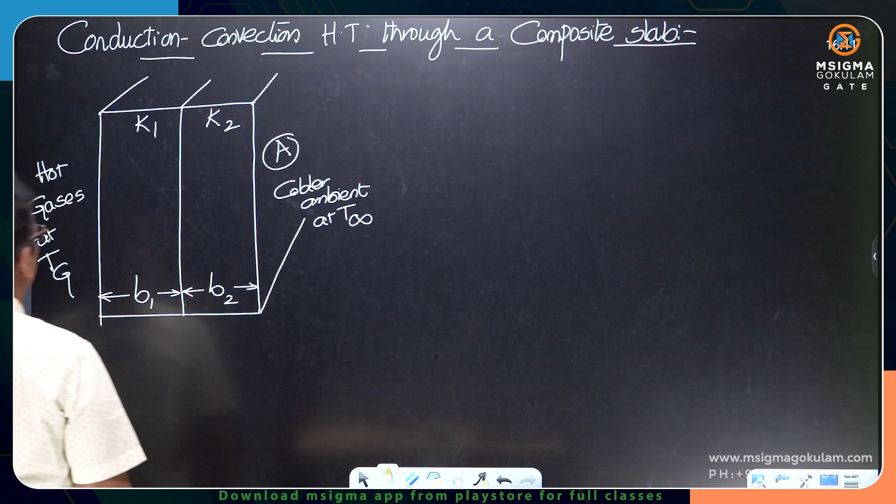Colder ambient at T infinity. Hot gases at Tg, colder ambient at T infinity. The heat transfer is happening through that composite slab in this direction, Q. Okay.

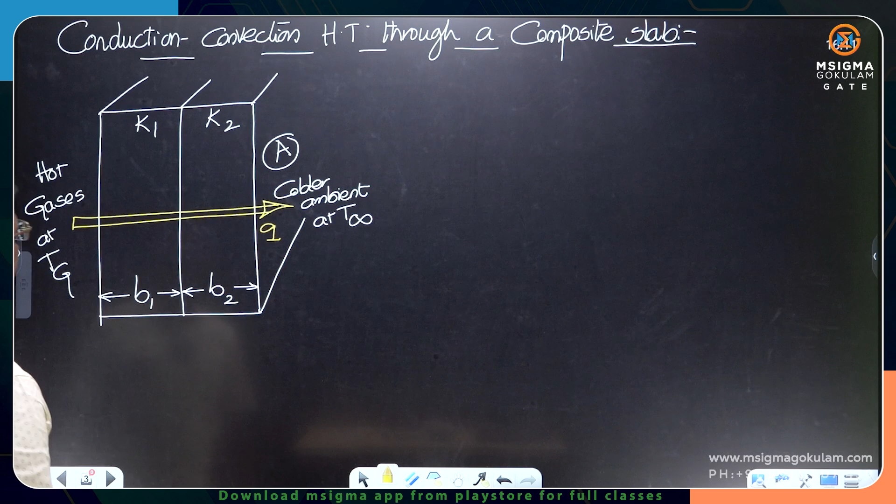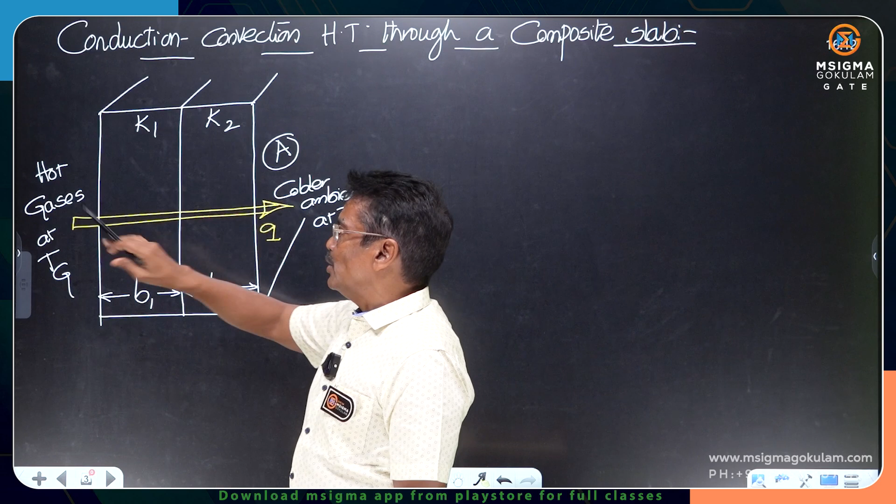There is a composite slab made up of two materials, okay, having the conductivities K1, K2. One side of the slab is exposed to the hot gases at Tg, and the other side of the slab is exposed to the colder ambient fluid at T infinity. Tg is far greater than T infinity.

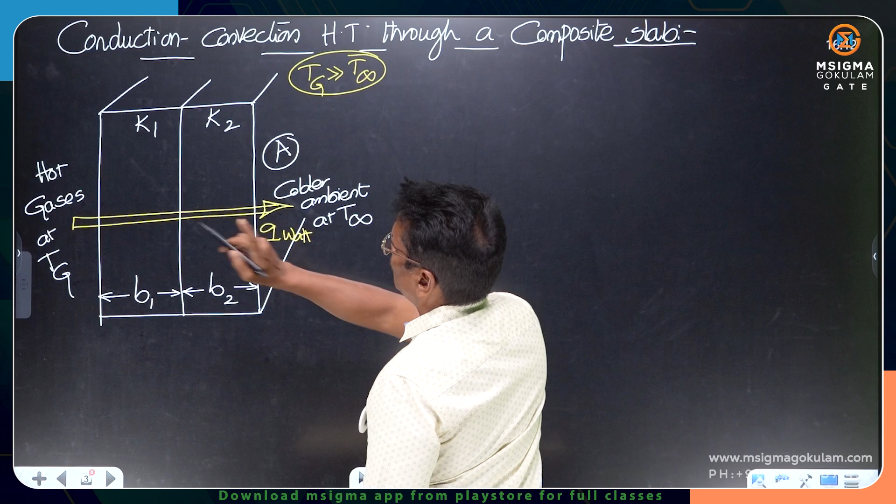Some flue gases are there. Hot flue gases are generating the heat. Now, I would like to calculate what is the rate of heat transfer. Rate of heat transfer in what? Between the hot gases and the colder ambient fluid, and how to calculate the junction temperature. Okay.

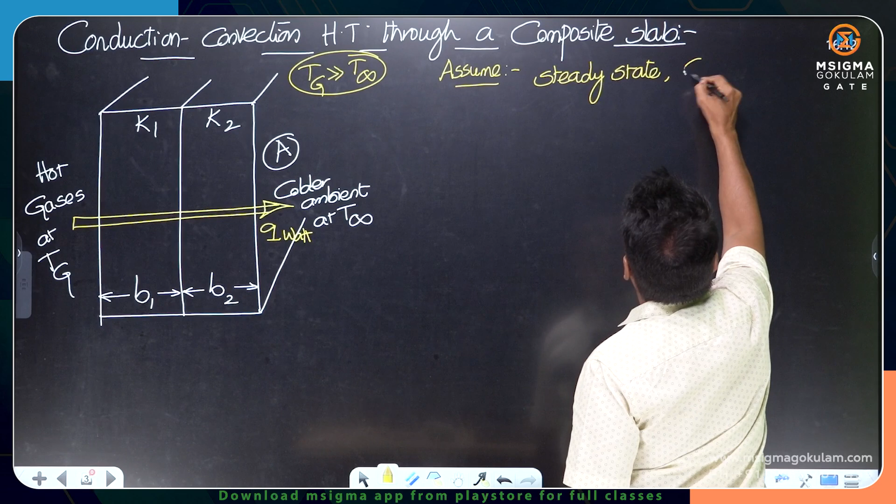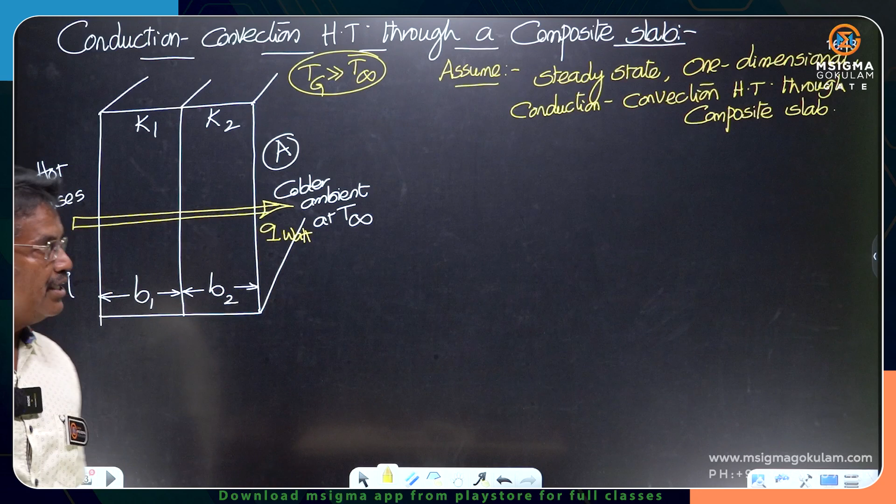Assume steady state one-dimensional conduction convection heat transfer through composite slab. Assume steady state one-dimensional conduction convection heat transfer through composite slab.

So, the main heart of the problem is construction of the thermal circuit and its understanding. In any heat transfer problem, particularly in this chapter of conduction, one must clearly understand what is the thermal circuit and how to calculate the heat current. Okay. So, the thermal circuit looks like this.

How many resistances there? Means what is the mode of heat transfer between the hot gases and this side of the slab? It is by convection. Because between the hot gases here, the heat transfer occurs by convection. So, whenever there is a convection, how do you notify that? With a given value of the convection heat transfer coefficient. So, there is a convection here.

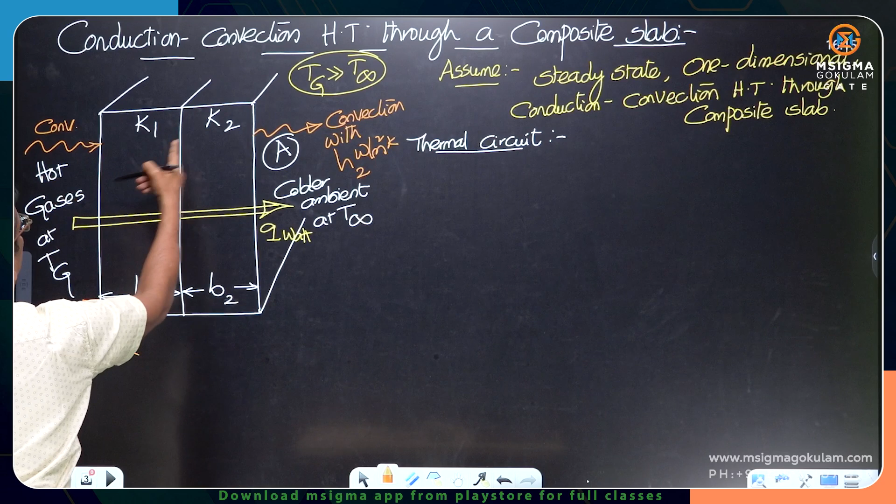There is a conduction here, there is a conduction, and again this side there is convection with H2. Convection, conduction, conduction, and again there is convection. So, you speak of convection, H is always a given parameter. Particularly in the conduction chapter, you are talking about convection, H is a given parameter.

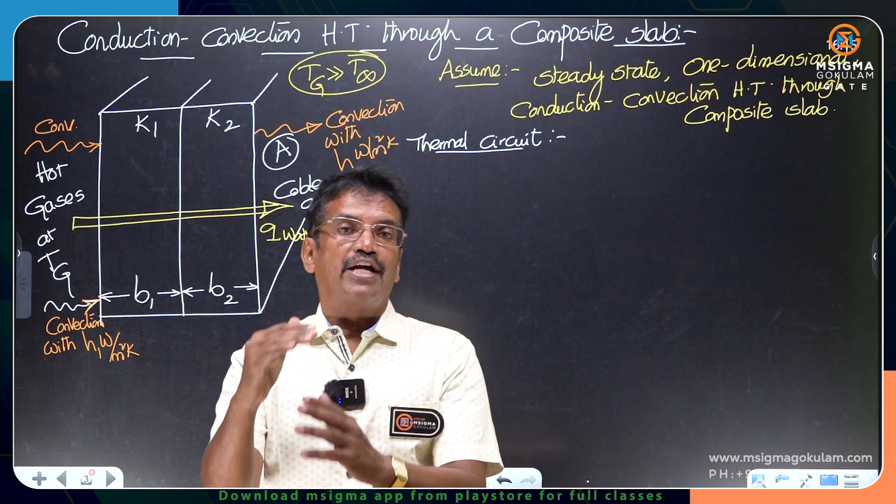But later when you enter the convection chapter, our main focus would be how to calculate that convection heat transfer coefficient from a given data of the solid body and the fluid flow. We will be calculating how to get that H. So, in the entire convection chapter, our main focus will be how to calculate that H value.

But in the initial chapters and initial topics of conduction, wherever convection is spoken of, H is always a given parameter, which is a convection heat transfer coefficient, also known as the film heat transfer coefficient. Look at the units there, watt per meter square Kelvin.

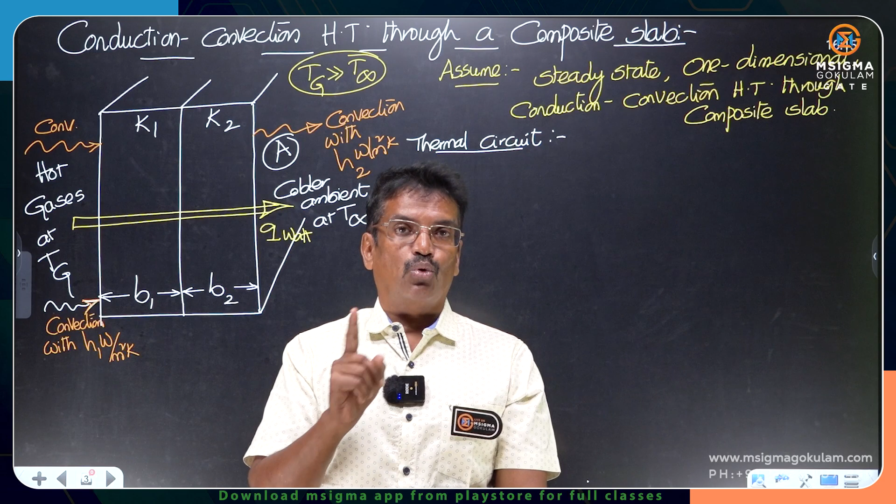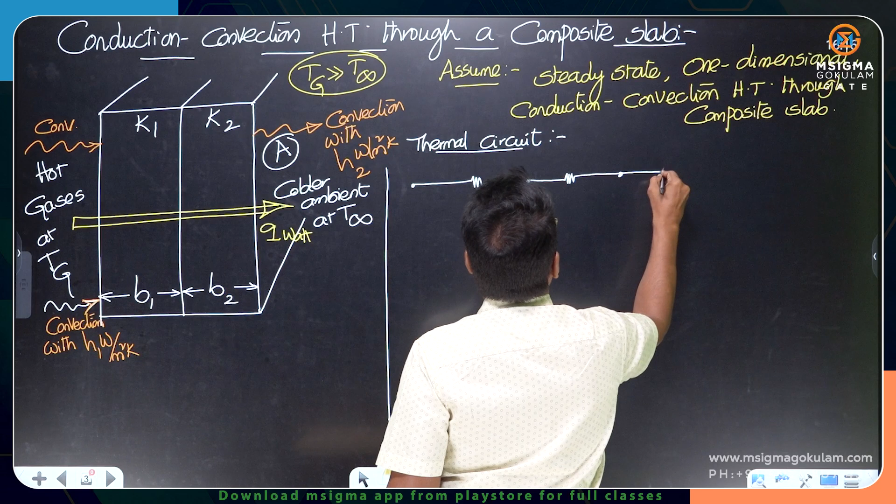Okay. So, the thermal circuit contains how many resistances? Convection, conduction, conduction, and again convection. So, the thermal circuit comprises 4 resistances: convection, conduction, conduction, and again convection. Tg and T infinity. So, will be

the temperature profiles will be like this. Why it is curvilinear like this, you will come to know only when I teach the thermal boundary layer concept in convection. So it is curvilinear here, straight line, and again curvilinear. This is the temperature Tg, this is T infinity.

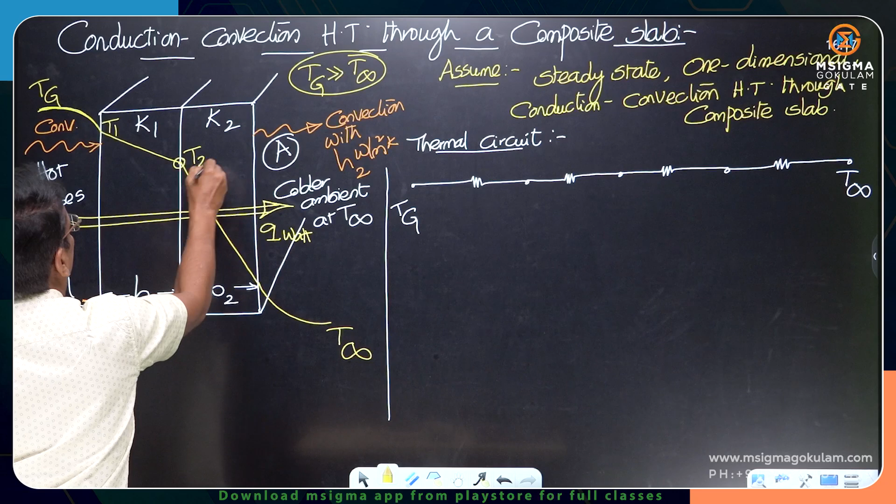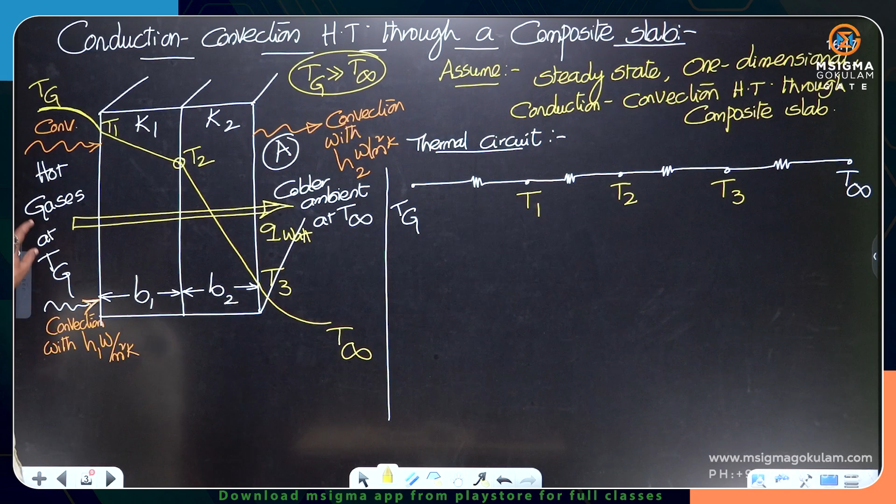This temperature is T1. What is T1? The leftmost temperature of this composite slab. This is T2, junction temperature. This is T3. Okay, Tg, T1, T2, T3 and T infinity. Tg is the temperature of the gases, and T infinity is the temperature of the colder ambient, maybe atmospheric air. So first convection, conduction, and again convection.

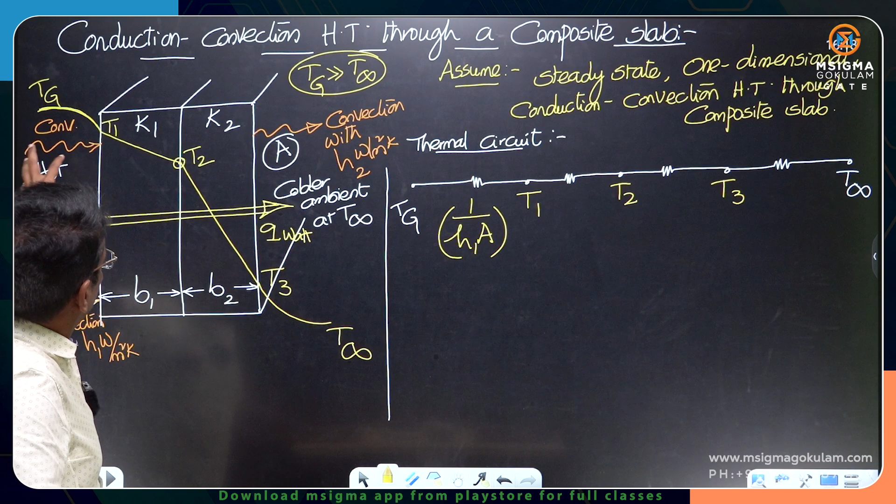What is the first resistance? Convection thermal resistance 1 upon H1A. That is the first resistance, convection. Then you will have the conduction resistance B1 by K1A. Then you will have the conduction resistance B2 by K2A, and finally we will have the convection thermal resistance 1 upon H2A.

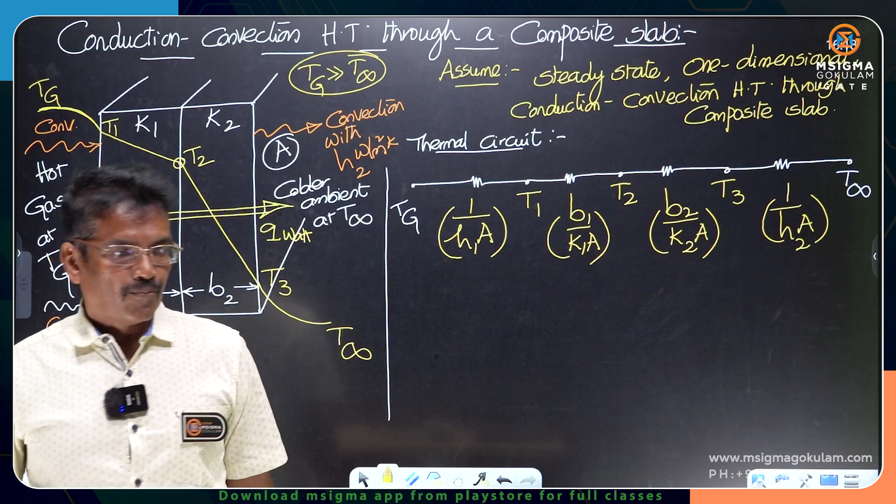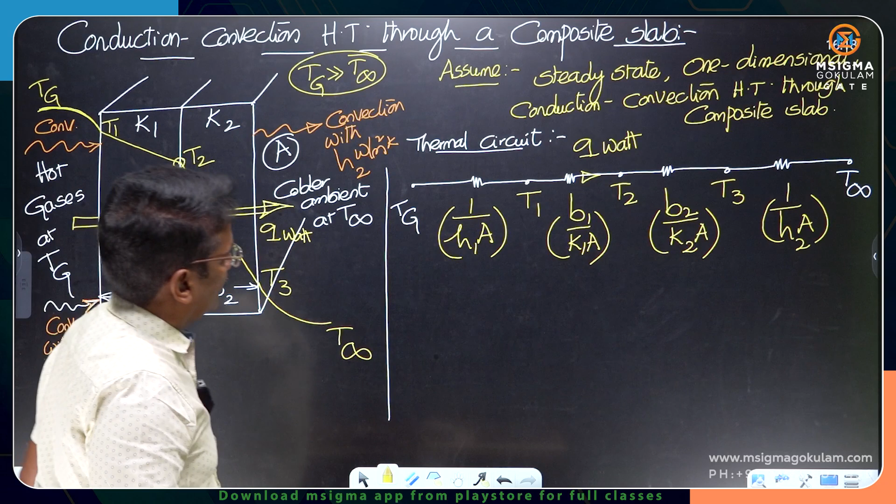Okay, the flowing current is Q, the rate of heat transfer between the hot gases and the ambient colder fluid. Tg is much greater than T infinity. So the mode of heat transfer is like this: first by convection, conduction, and again convection. Totally there will be 4 resistances. Convection resistances on the left and right hand sides, and in between we have the 2 conduction resistances.

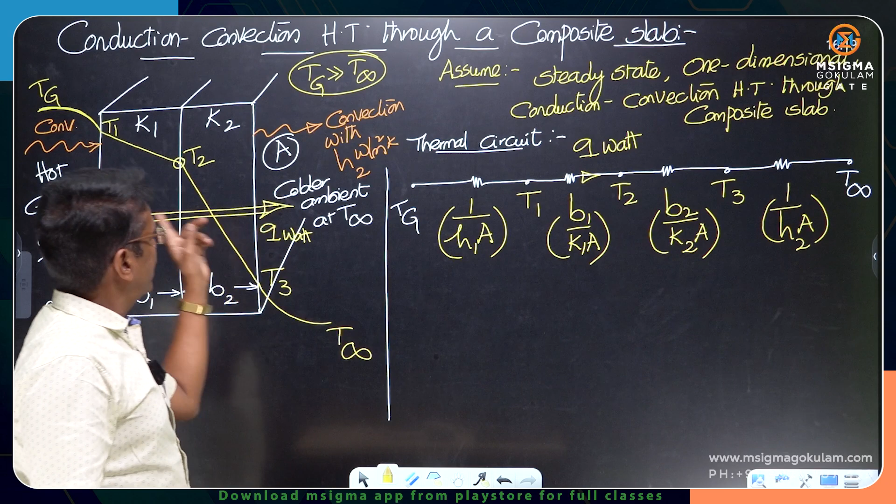The flowing current is rate of heat transfer Q. Therefore, rate of heat transfer between hot gases and ambient fluid is the total thermal potential Tg minus T infinity divided by sum of all the resistances. All the resistances are in series. Therefore, what is the total resistance? Sum of all the resistances. And mind that the area of heat transfer is not changing in the direction of the heat flow.

I already said the main character of the heat transfer through a slab is that the area of heat transfer will not change in the direction of the heat flow. But later, when you come across different geometries, like radial heat transfer through a cylinder or radial heat transfer through a hollow sphere, there the area of heat transfer changes. In the case of slabs only, the area of heat transfer will not change in the direction of the heat flow. Okay? That is why I am not writing A1, A2 like this.

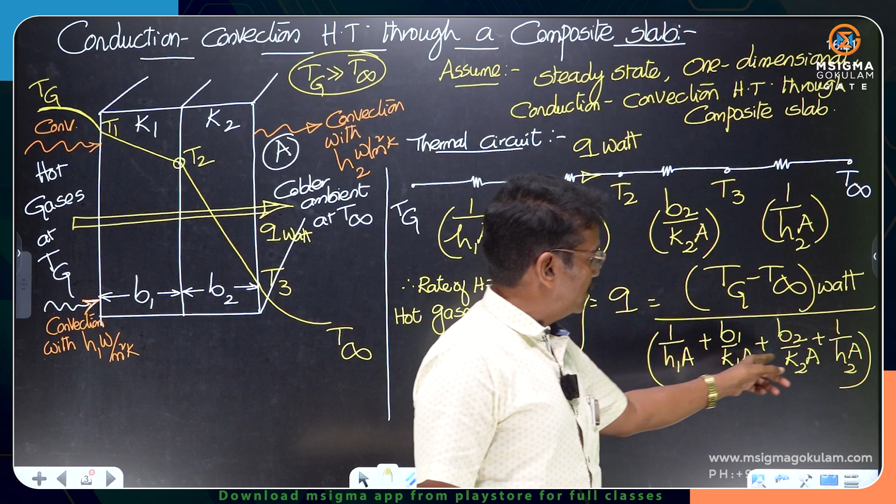And I already said, in the case of slabs, in the majority of cases we will write the heat transfer rate per unit area, which we call the heat flux. Therefore, heat flux, meaning heat transfer rate per unit area, Q upon A, will be Tg minus T infinity, where Tg is the temperature of the hot gases, divided by the sum of all the resistances per unit area.

Heat flux means what? Heat flux or the heat transfer rate per unit area, both mean the same. Flux is a word which you see only in this subject, heat transfer. Heat flux or heat transfer rate per unit area: B1 by K1 plus B2 by K2 plus 1 upon H2. These H1, H2 values will definitely be different, even though the fluid is the same.

Suppose the fluid on this side and the fluid on that side are the same, but still, if it is forced convection or free convection, the H values will be different. H is not a property of the fluid, not a property of the solid. H depends upon a few thermophysical properties, rho, mu, Cp, K. But H itself is not a property of the medium or the material.

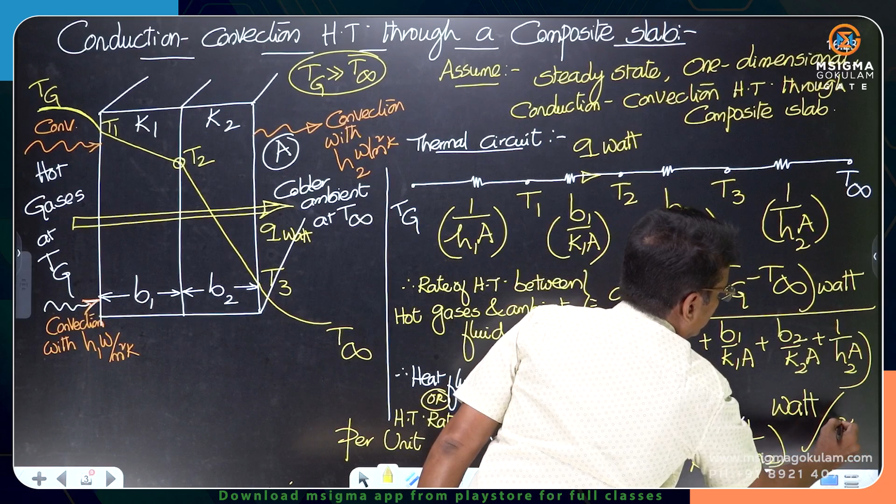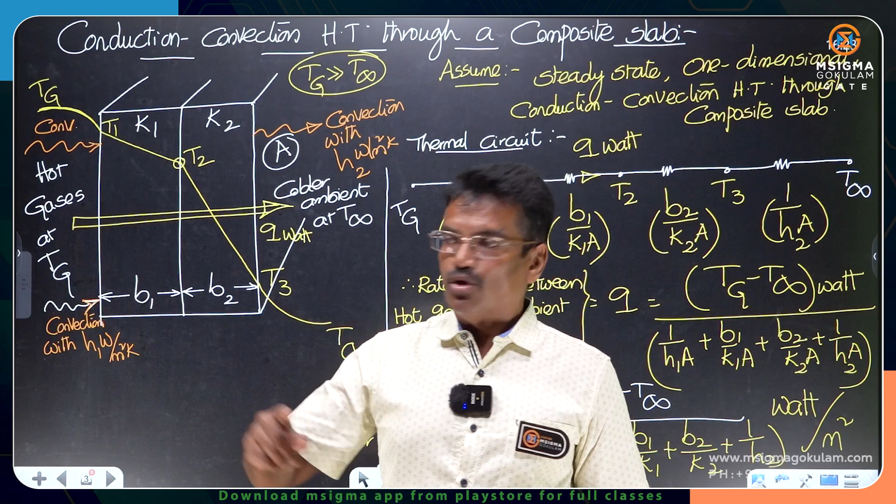So heat flux means what? Heat transfer rate per unit area. Whenever you see flux, the units you will come across are per meter square. So this is how we calculated the heat transfer rate per unit area through the composite slab with convection on both sides of the slab, right? Now, whenever there is multi-mode heat transfer, multi-mode means more than one mode. There is conduction here, but on the other sides you have convection.

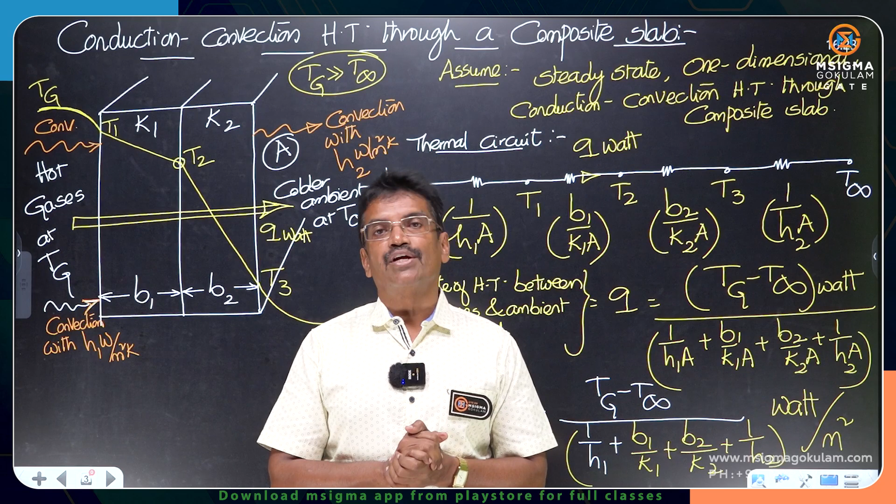Whenever there is multi-mode heat transfer, sometimes radiation also may be there. All three modes of heat transfer may sometimes exist. But generally in our GATE problems, in our analysis, we usually come across two modes of heat transfer at a time. So whenever multi-mode heat transfer exists, we bring in one important coefficient called the overall heat transfer coefficient, indicated as U. Let me define the meaning of the overall heat transfer coefficient. This U and H have the same units.

What is the definition of U? U is the parameter which takes into account all the modes of heat transfer in a single entity. Even though U has the same units as H, H speaks only of convection, but U, look at the word, is overall. Overall means all the modes of heat transfer effects are put into one nutshell. So I could define U as the parameter which takes into account all the modes of heat transfer, conduction, convection and radiation if it exists, in one entity, and thus it indicates the total thermal resistance offered by all the modes put together.

That means if the total resistance is more, the U value will be lesser. If the total resistance, all the conduction and convection resistances I gave earlier, is lesser, the U value will be more. U is the parameter which takes into account all the modes of heat transfer in a single entity, and hence is defined from the equation Q equals U A delta T.

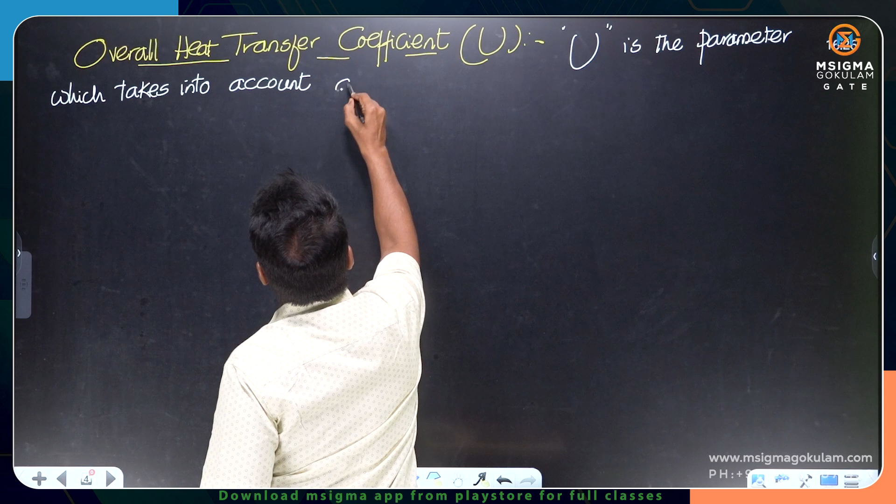U is the parameter which takes into account all the modes of heat transfer into a single entity, and hence is defined from the equation Q is equal to UA delta T. Sometimes I write the Q this way or that way; it does not matter, both mean the rate of heat transfer, UA delta T.

U and H have the same units. This U is the parameter you see in almost every problem of heat exchangers. Whether it is the LMTD method, log mean temperature difference method, or the effectiveness NTU method, in both methods U is a compulsorily used parameter when you are doing any heat exchanger problems. Later we will see in the heat exchangers chapter. That is watt per meter square Kelvin. This is the units of U, right?

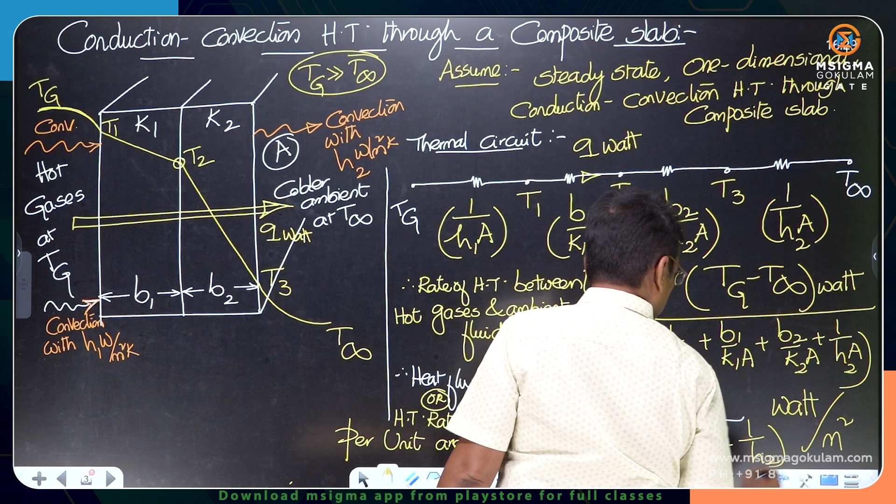Now, if we just take this equation as 1 and this equation as 2, comparing 1 and 2, we get 1 by U is equal to 1 by H1 plus B1 by K1 plus B2 by K2 plus 1 by H2. This is the formula for the U. Mind that U and H will have the same units.

And regarding the U, I would like to give this point. If the total thermal resistance in the entire thermal circuit is lesser, then U value will be more. I can say this U talks about the relative magnitude of the total resistance.

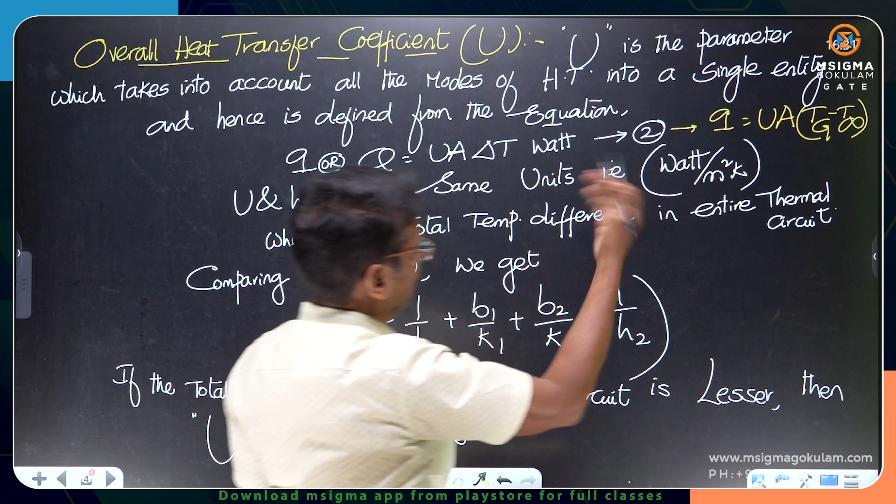Look at the name of it, overall heat transfer coefficient. From the definition, if U is more, rate of heat transfer is more. That means the total thermal resistance against the heat flow would have been lesser. Okay? U and H will have the same units. That point also you have to keep in mind. The delta T is Tg minus T infinity. You can see here, Q is equal to UA times the total thermal potential. The total thermal potential Tg minus T infinity must be taken to define the overall heat transfer coefficient.

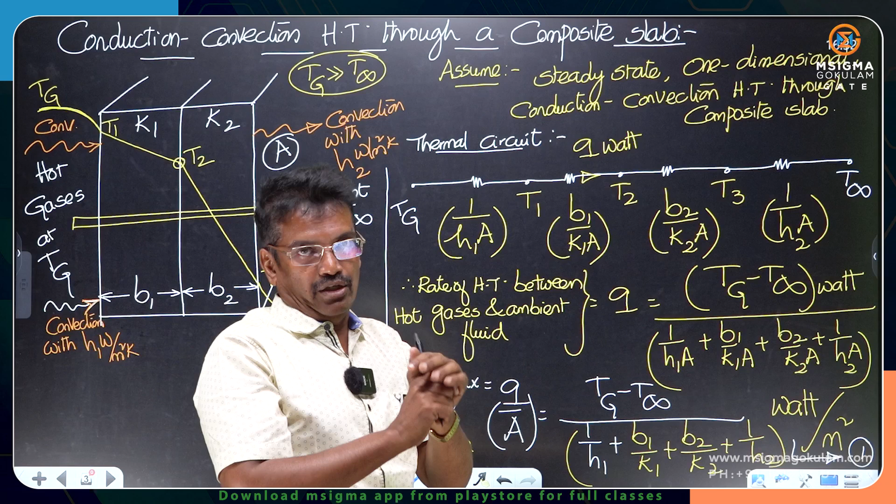But basically, U will take into account all the resistances in one nutshell. If the U value is more, the total resistance against the heat flow would have been lesser. U simply puts every resistance into one nutshell. If U is more, total resistance will be lesser.

I am not advising you to remember all the conductivity values, but for the important ones like water, air, mercury, aluminum, copper, you should at least try to remember the relative values of K. Sometimes they will give you 4 materials and ask you to arrange them in ascending or descending order of K. I have seen many such questions in GATE also. So have some idea about which materials have more K and which have lesser K.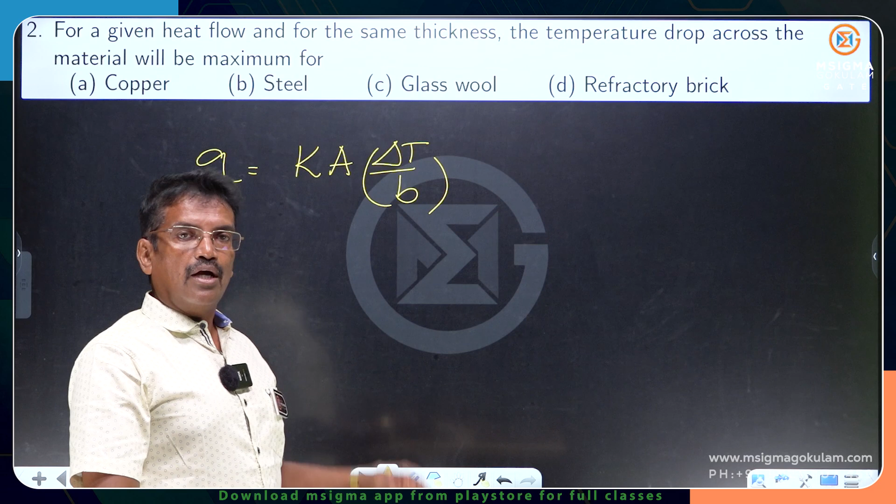From previous papers of IES and previous years of GATE, I have picked up some important models and I am solving them. For a given heat flow, Q is fixed, and for the same thickness, B is also fixed. B is the thickness, right? He is asking about delta T across the material. Delta T is maximum from that given equation obviously when K is minimum.

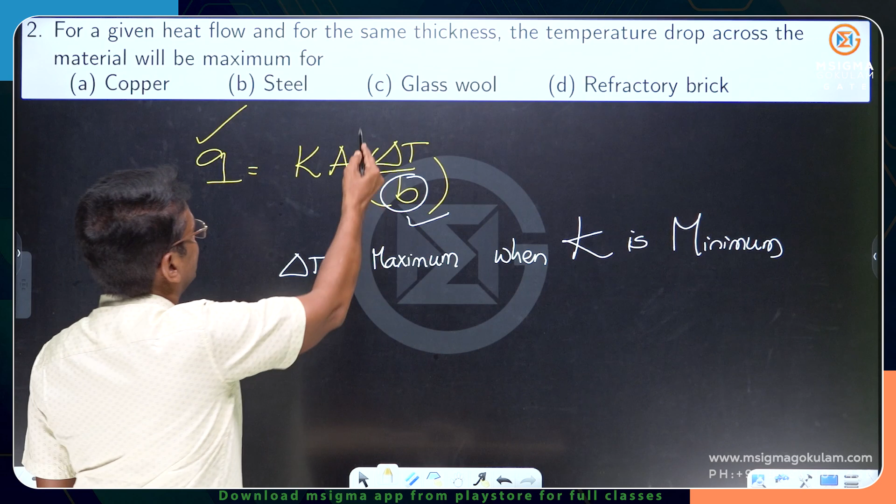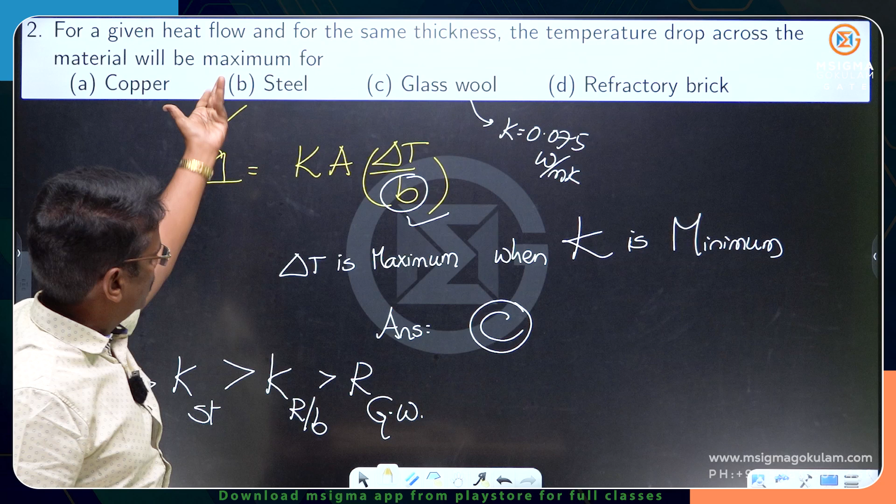So which material has got the minimum K among all those? Glass wool. Answer is C. Glass wool has got a K value of 0.075. Refractory brick is around 0.8 or 0.9. So if we just look at the descending order, K of the copper is greater than the K of the steel, greater than the K of the refractory brick, greater than the K of the glass wool. This is the descending order of the K. Of course, these two are the insulating materials. These are the metals. Metals are very good conductors. So answer is C.

He has asked the descending order, it is also a previous GATE question. In descending order of magnitude, conductivity. Iron, liquid water. Pure iron is a metal. All metals possess good conductivity. Aluminum is highest, around 200. The conductivity of pure iron is only around 50, K of the aluminum is around 200. Aluminum is an excellent fin material because of its high conductivity and low weight. Aluminium is a very commonly adopted fin material because of its low density, very light, and having a very good conductivity.

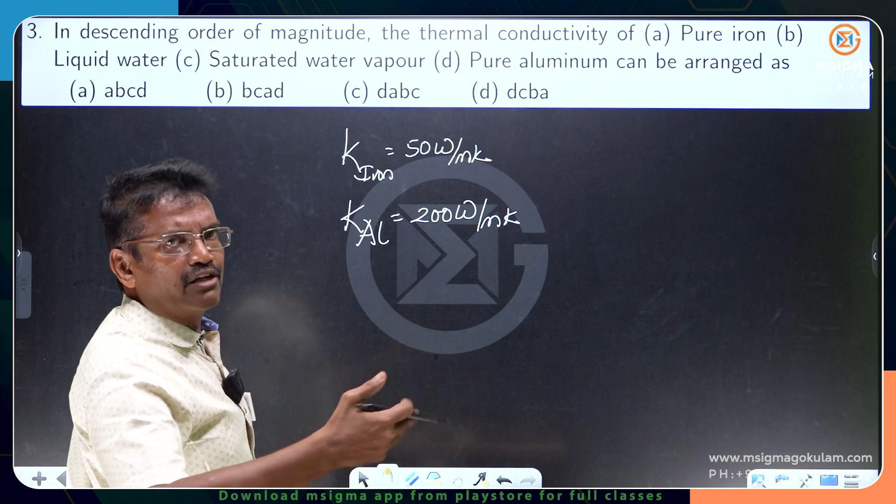Water vapor is almost same as air. Air and water vapor, their conductivities are almost equal. So answer will be D, greater than iron, greater than liquid water, that is B, and least is C. D, A, B, C. Answer is C. This is the descending order.

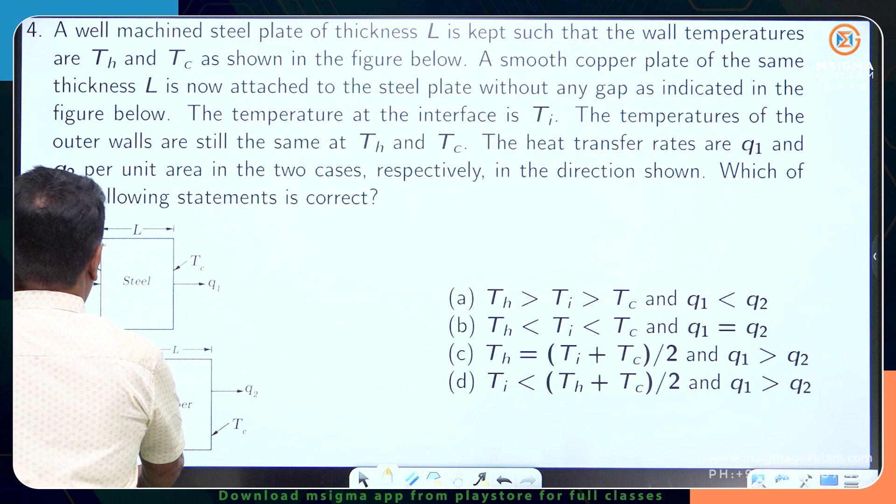Flowing current is Q. What is the first resistance here? They are in a series circuit. Series circuit means one after another. Current is flowing first through this slab and then through this slab. This is the direction of the heat flow, right? What is the first resistance? 2B by K1A. Second resistance will be B by K2A. Flowing current is Q, so Q is same throughout.

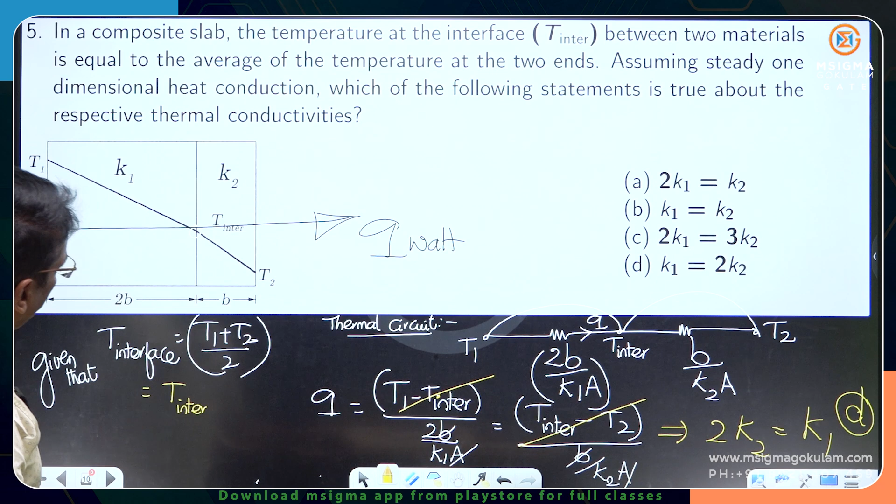Actually, just by looking at that figure itself, we can notice that K1 is greater than K2, because this slope is lesser and this slope is more. From the figure itself we can judge that K1 is more than K2. When the slope is lesser, conductivity is more. But he has asked the exact relation. So, answer is D, K1 = 2K2.

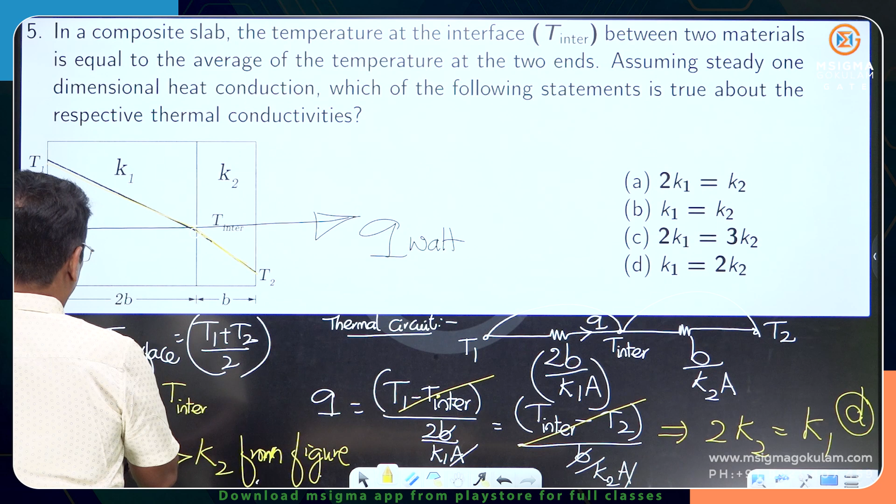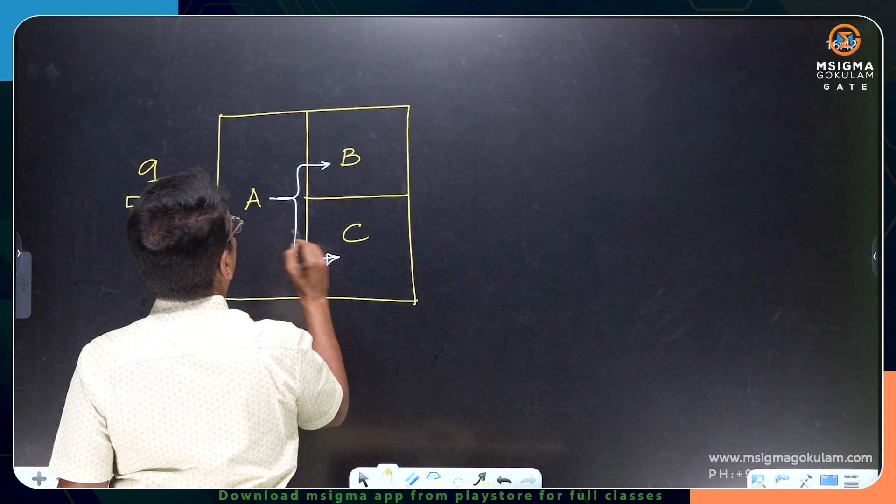There are three materials A, B, C. If this is the Q, then the heat will be conducting simultaneously through both the materials like this and like this, right? Simultaneously heat will be conducted. Then the thermal circuit will be: first resistance is A, then the resistance will be B, and then the resistance will be C.

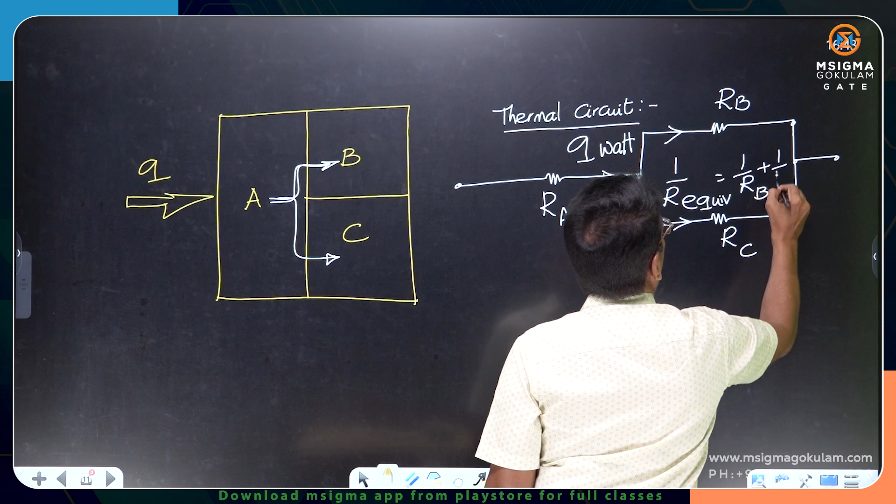Okay, this is the resistance of A, this is the resistance of B, and these are parallel, no? These heat resistances are in parallel. Now in such case we can calculate that equivalent resistance as 1 by RB plus 1 by RC. When the two resistances are parallel, we can calculate the equivalent resistance, and this will be combined to this to get the total resistance. We know that when two resistances are parallel, how to match them.

Okay. So this is the parallel circuit and the series. Heat will flow first through the A, and then heat will be flowing parallel in these two parallel resistances. This is current QB. This is current flowing through the C. Okay. So, this is the thermal circuit for the series parallel arrangement.

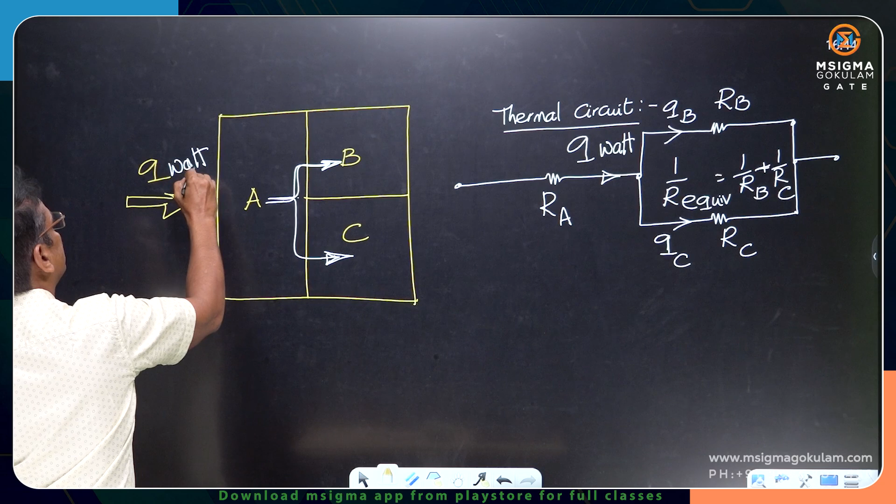As the temperature increases, the thermal conductivity of the gas also will increase. Last class, I have shown you that variation also. For any gas, as the temperature increases, conductivity increases, viscosity increases, specific heat increases, but only one thing will decrease, that is density. When a gas temperature increases, conductivity, viscosity, specific heat, all three will increase, but density of the gas will decrease.

But somebody may ask, what about the liquids? Generally, for most of the liquids, as the temperature increases, thermal conductivity will decrease. But few exemptions are there, like water and glycerin. For water and glycerin, as the temperature increases, for some temperature range, the conductivity will increase. After that, conductivity will decrease.

But generally, you may remember that for gases, as the temperature increases, conductivity increases. For liquids, as the temperature increases, conductivity may decrease, except water and glycerin. For water and glycerin, first it will increase and then decrease. So, look at this problem. It is a previous GATE question, given in the previous GATE examination.

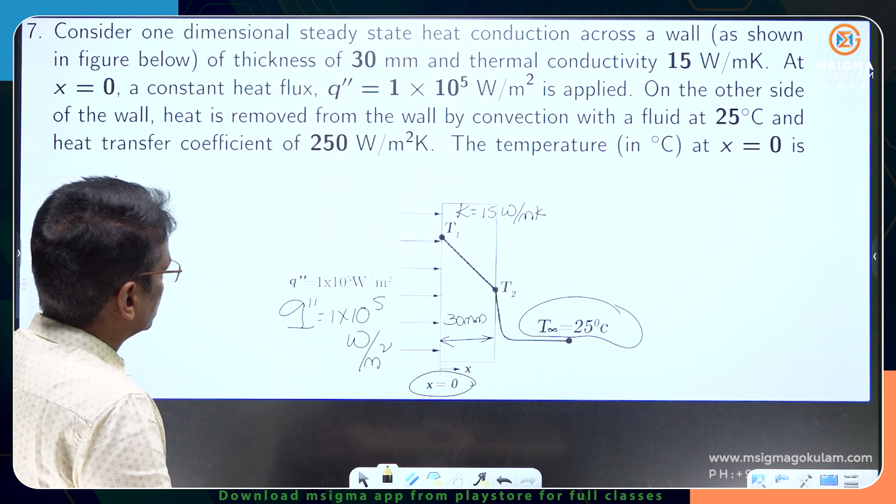On the other side of the wall, heat is removed from the wall by convection with a fluid at 25 degrees Celsius. Heat transfer coefficient is 250 watt per meter square Kelvin. Here there is a convection happening on the other side. The convection h will be 250 watt per meter square Kelvin. What is the temperature at x is equal to 0? What is the temperature here? So, that means he is asking what is T1.

Between T1 and T infinity, how many resistances are there? One is conduction here. There is a conduction, no? And then here we have the convection between this surface and the fluid. Between a solid and fluid, what is the mode of heat transfer? Convection. So, between T1 and T infinity, if you draw the thermal circuit, there is one conduction resistance followed by convection resistance. This is conduction, this is convection.

What is the conduction resistance formula? B upon kA. What is the convection resistance formula? 1 upon hA. But he has given the per meter square. So, what is the area of heat transfer here? Area of heat transfer will be 1 meter square, because he has given the flux, watt per meter square. That means area of heat transfer is 1. So, this is the Q upon A. Therefore, Q upon A is equal to 1 into 10 power 5 watt per meter square heat flux is equal to T1. This is T1.

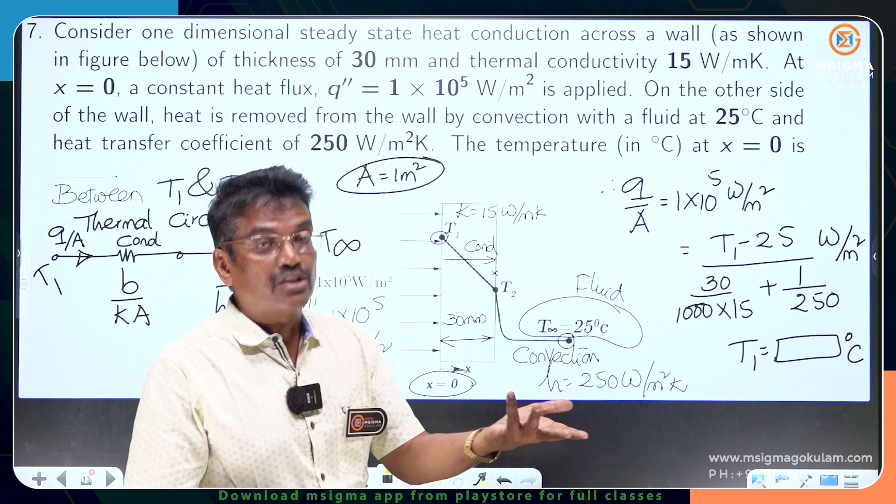Suppose you are getting the answer in Pascal and sometimes they ask kilopascal; though you got the correct answer, because of the wrong feeding, your answer will be wrong. You got the correct answer, but if you don't observe the units asked in the question, you will be typing the wrong answer. So, it is Celsius, I can keep it in Celsius. Sometimes he may ask Kelvin. Be careful about numerical data type questions.

This is a very good question asked in the recent GATE examination. A slender rod, slender means thin, of length L, diameter D, L far greater than D and conductivity K1 is joined with another rod of identical dimensions but thermal conductivity K2 to form a composite cylindrical rod of length 2L. First let me draw it. This is L, this is L, diameter is D. This conductivity is K1, this is K2, joined end to end. So you got a composite cylindrical rod of length 2L.

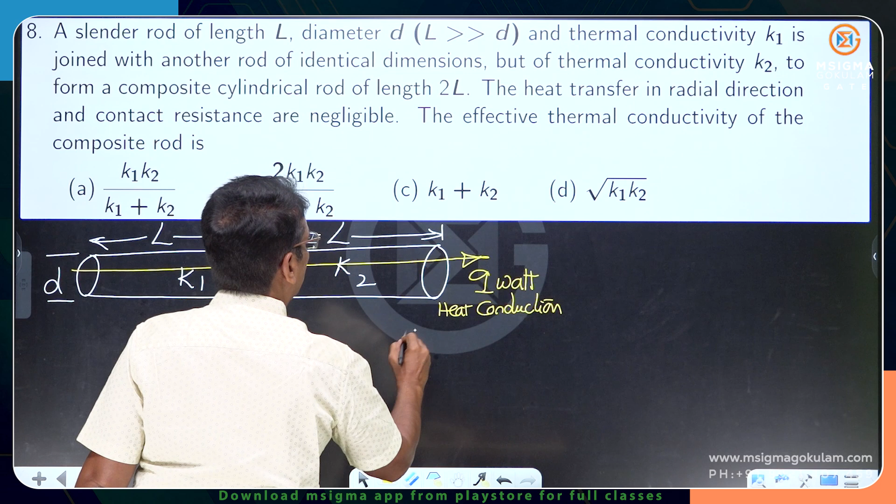The heat transfer in radial direction and contact resistance are negligible. That means there is no heat transfer in the radial direction. Read the problem correctly. Whatever heat transfer is happening, this is the direction of the heat flow. Because there is no radial conduction, heat conduction is along the axial direction only. How do you know that? He has clearly mentioned it.

What is the effective or equivalent thermal conductivity of this composite rod? You have got a rod of length 2L, Q is passing. Effective or equivalent both mean the same: K effective or K equivalent of the composite rod. When you talk about equivalence, please remember, what you have to compare is thermal resistance and area.

Two different geometries are said to be thermally equivalent from the heat transfer point of view only if the thermal resistances are equal between them and the area of heat transfer is equal between them. I repeat once again, two different geometries are thermally equivalent only if, number one, the thermal resistance must be equal, and number two, the area of heat transfer must be the same.

Is the area of heat transfer the same? Yes. This is the diameter, this is also the same diameter, right? So the area of heat transfer is the same here. One condition is satisfied. And by equating thermal resistance, what is the thermal resistance in this situation?

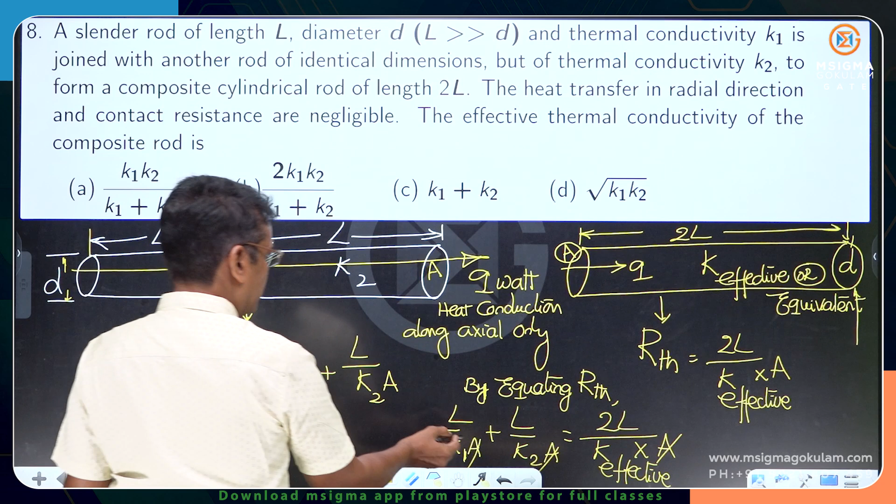Now, what is the K effective? You can easily write that. L also gets cancelled in the numerator. So 1 by K1 plus 1 by K2 is equal to 2 by K effective.

So what is the answer then? K1 K2 is the LCM here, and K1 plus K2 will go to the denominator here. That is 2K1K2 by K1 plus K2. Answer will be B. This is the answer for K effective.

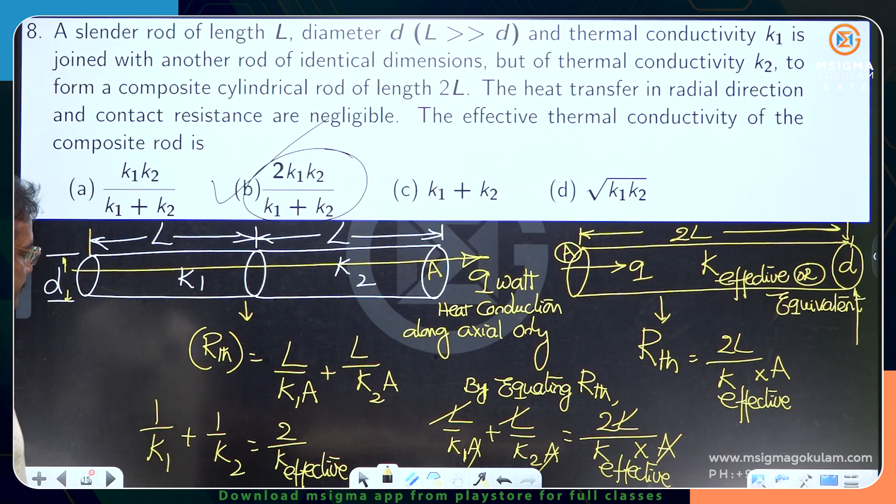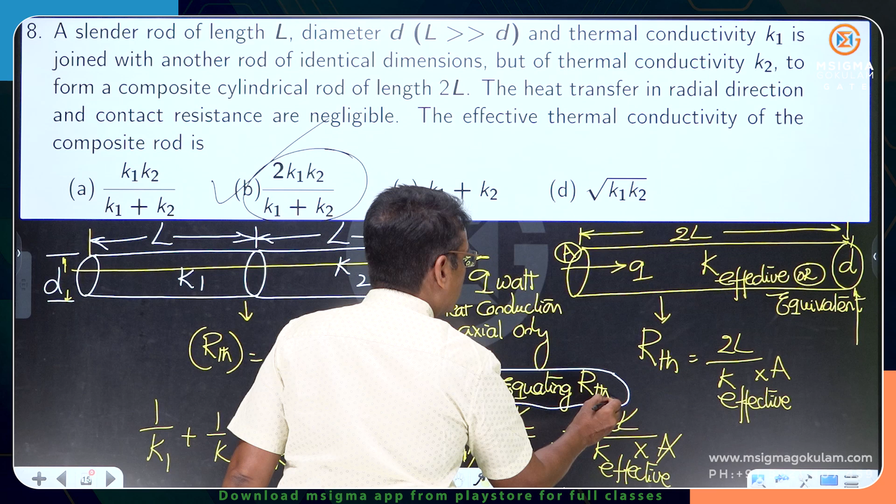Please note, this problem is very important because it is defining the equivalent thermal conductivity. Two different geometries are thermally equivalent if their thermal resistances are equal. What I have done is, I just equated the thermal resistance because areas are also same. The area of heat transfer should be same. Then only that equivalence concept will be valid.

I just equated the thermal resistance between these two situations. I got this answer B. Very good question which is asked in the recent GATE examination.

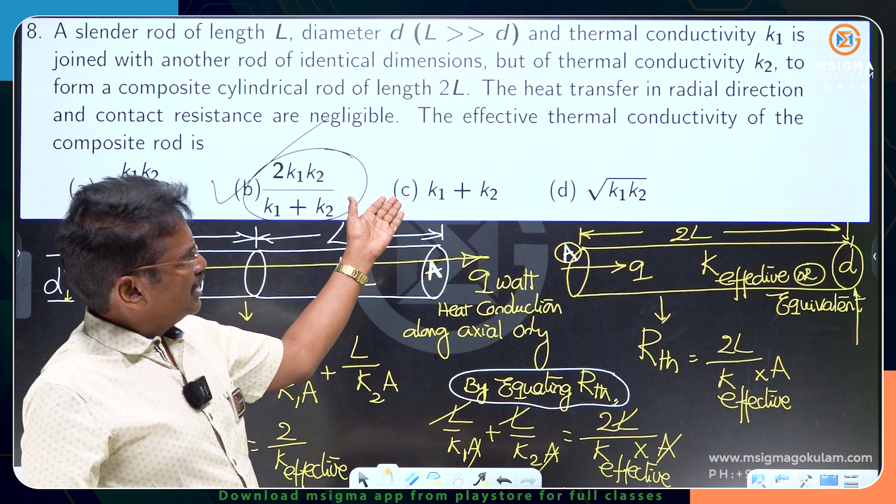This problem is also very easy. In a furnace, the inner and outer surfaces are given, 1100 and 700. The brick wall is covered by insulating material of thermal conductivity K2. Thickness of the insulation is 1/4 of the thickness of the brick wall.

That is L2 is 1/4 of L1. The outer surface of the insulation is 200. The heat flux through the composite wall is given; find the value of K2. Very simple problem, also given in the recent GATE examination. Just construct the thermal circuit, you will easily get the answer.

Just construct the thermal circuit. How many resistances? Conduction only, there is no mention of convection. Only two resistances. Both the slabs are attached to one another, so it is a series circuit. Q by A is given. Flux is given; in slab cases, majority of the problems give the flux only.

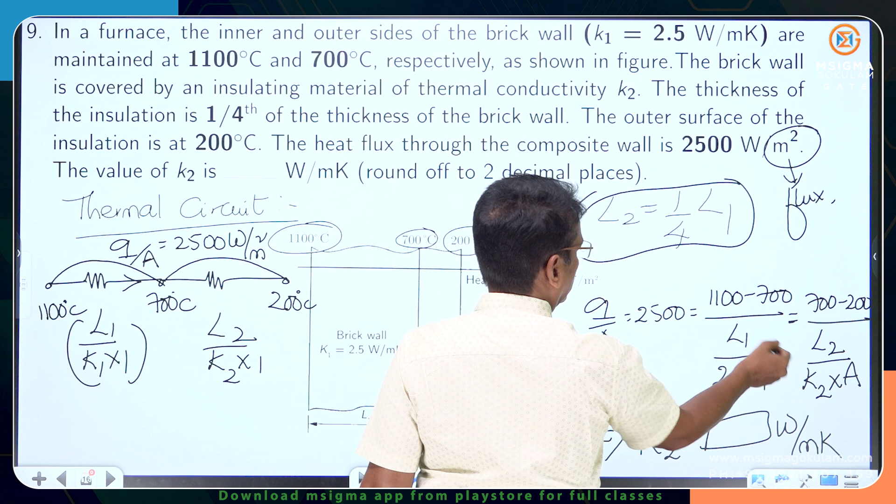Suppose K2 is 3.545, 54 must be typed correctly. The third decimal doesn't matter. Put L1 equal to 4L2, that L2 gets cancelled, and you will get the answer for K2. Such questions are very common in the GATE examination. This is also a recent GATE question.